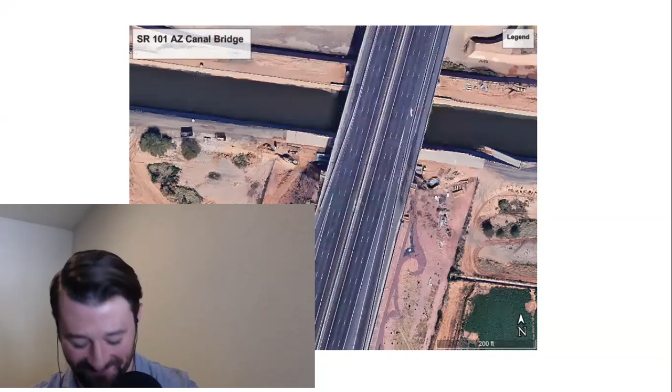It sits over the Arizona Canal. We have thousands of miles of irrigation canals, it seems like, throughout Phoenix. This is just one of them. We also have an issue out here with a lot of our bridge approach fills as they come up to abutments. There's a definite bump in the road. What's often happened is that our backfills on the bridge approaches weren't historically controlled in terms of moisture content when they were constructed. They were compacted to 95 or 100%, but moisture control wasn't key back in the day, and a lot of these have gotten wet since for various reasons, and we've had settlement at these approaches. This is just one of those, and what we had here was we were adding an outside general purpose lane to each northbound and southbound on the freeway.

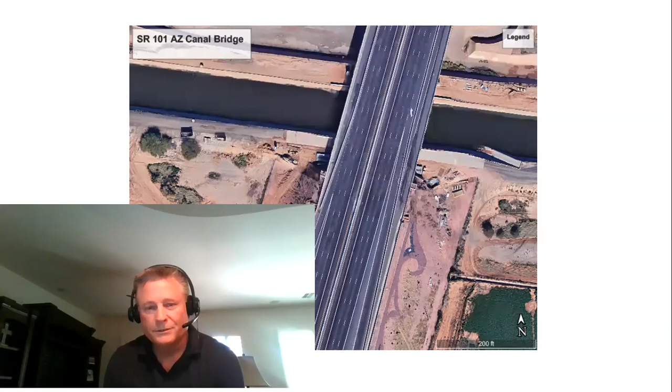And so you can imagine you're constructing a new lane at a certain profile, and you get up to this bridge approach, and there's a 3 to 4 inch bump in the pavement. So now your new profile doesn't match the existing profile. So what do you do? We need to fix the existing profile.

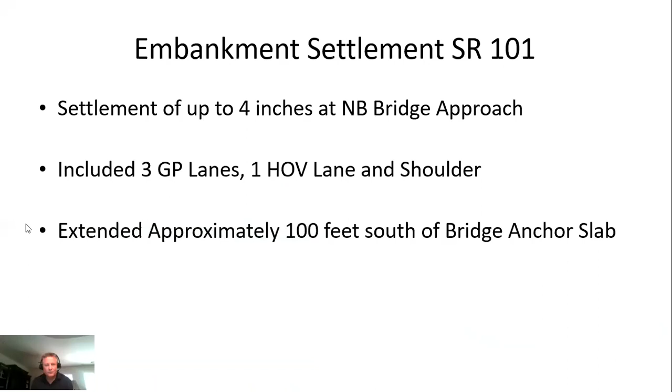Here we only addressed really the northbound bridge approach to this bridge. The other 3 corners basically have all had issues. I believe, was it Uretek or Eagle Lift was out there and possibly did some work on, was it the southbound approach? The southbound lanes, yeah, that was probably 2014. Okay. Yeah, so here we had a bump in the road of about 4 inches that we needed to deal with.

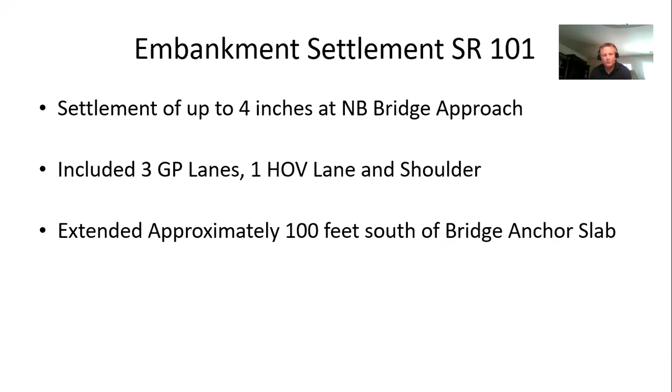Obviously, it's soft there, so this basically impacted all of the northbound lanes, including the shoulders. We had 3 general purpose lanes, an HOV lane to the inside, and the outside shoulder. Some profiling was done along the bridge itself to see kind of where it sat.

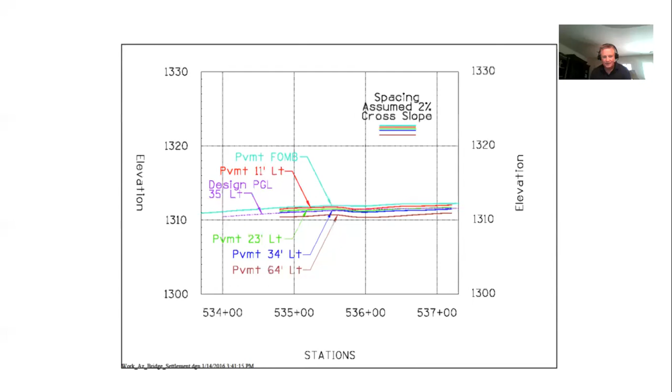It's been a little while since we've actually done this project now, so I'm not quite clear on all the details, but that's definitely the bump that we had to deal with. So why don't we go back to your first involvement with the project and when the existing lanes became identified as having a dip and how that would impact the new lanes.

Yeah. What we did there was our investigation for the general purpose lanes, which were being built to the outside, revealed to us that we had this issue. We sent out a couple emails to ADOT, said, hey, what do you want to do with this? It really wasn't in our scope or the prime designer's scope, in this case it was URS, to actually address what was going on within the existing lanes. However, obviously, you need to be able to tie it all together.

And so what they decided to do was make this a post-design remediation. And so Pulice Construction was already out on the job building the road. They added it basically into their scope to determine what we should do there. And so I don't know exactly who had WTI come out, but Western Technologies went out and drilled a couple holes. That may have been done directly for Pulice.

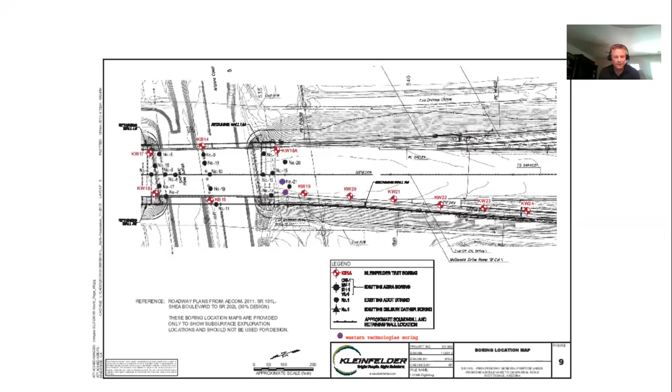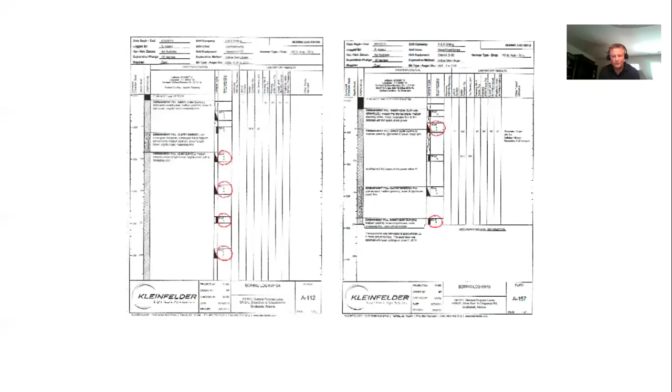So we couldn't really use those other than to get an idea of what was going on underneath the area where we're having settlement. And the soils at those depths actually look pretty good. So the red are really indicators of bad conditions. We've got bad conditions on that first boring from 10 to 25 feet. And then the other one shows it's softening in at 5 and 20 feet.

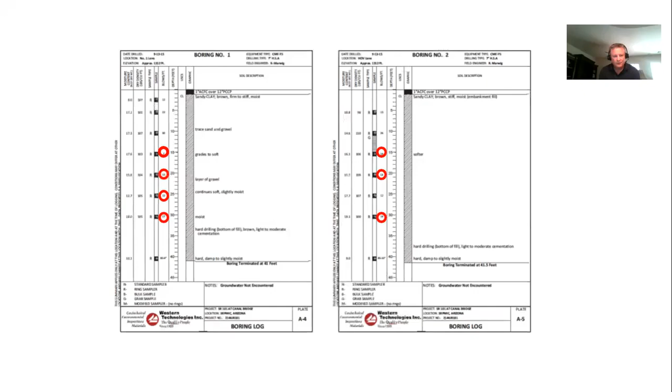And then the other two logs, which are maybe a little easier to read, those are all ring samples, not SPT values. You convert those to SPTs and you get values anywhere from about 3 to 11. So, they're pretty soft. Again, I think this material was probably put in fairly dry, got wet at some point, and just lost its strength. And so this is really the zone that we were dealing with, primarily from about 10 to maybe 25 feet.

Again, looking at this, then we could consider over excavation, pressure grouting, polyurethane foam injection. I touched on over-ex. Pressure grouting with cement: the only reason I tend to lean away from this on embankment fills is due to the fact that you're adding a lot of weight to an embankment when you use cement. Unless you get your pressure bulbs stacked on one another, you're going to have gaps in between where the weight of that grout is going to tend to want to collapse on the next bulb, basically.

And so if you have a bunch of independent bulbs within the fill, with any one particular hole, these bulbs, which are heavy, are going to want to consolidate onto one another. And so I've always tried to avoid that by going with something lighter. Now, obviously, polyurethane is extremely light, and the other great thing I really like about it is that it's a closed cell composition. It doesn't take on water once it's injected.

You can cut a cross section through it and it might look like a sponge, but with a closed cell, it's really not letting any water get within it. And so it's not gaining weight over time. It just finds its way into voids. And believe me, there were a lot of voids out there. We pumped a lot of grout, but you can go into that later.

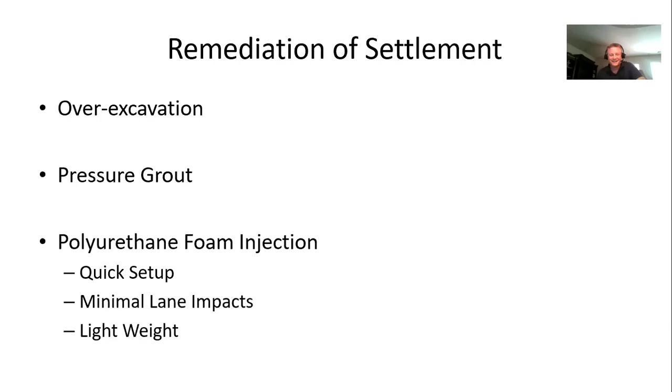I know a lot of the concern with ultimately the detour issue, right? Of some of these other alternatives were concerns when we were scheduling. And then we were also in a relatively, it's a freeway. It's a busy area of Scottsdale. You've got the casino. You've got Salt River Fields right there. Summer holidays. We were out there starting in May, and I think we even got close to 4th of July between spring training and. Mm-hmm. Oh yeah. All kinds of fun stuff to deal with. So I think what you guys did was you did all your work at night. All the work at night. We had about 2 lanes to work in at a time, plus a safety lane, depending on which 2 lanes we were working on.

But yeah, this graphic shows kind of the idea of what we're trying to accomplish. For those who aren't familiar with expanding polyurethane grout, we use a two-part polyurethane foaming system. So it starts out as two liquid components. When introduced to one another, the reaction between those components is an expansion. So the material used for this project had the opportunity to permeate through more granular soils first, and then as it started to expand, that expansion is what would cause the displacement, compaction, further densification of the embankment here. And as you continue to compact, you're building confining pressures, and ultimately, as those confining pressures build, eventually the path of least resistance becomes the load of the pavement.

And so in those shallower depths, you're actually able to accomplish lifting of the pavement, which we were able to do in this case. I don't know if we did a full 4 inches, but at least 3.5. Yeah, I think you maybe ran into somewhat a limiting factor on that inside median barrier where you couldn't lift it too far because it actually began to crack. I don't think you damaged it, but they didn't want to lift it any further. Is that right? Yeah. Ultimately, when you're lifting a pavement or a foundation, if there are areas that you don't want to lift, that's going to impact how much you can lift elsewhere, because you kind of have to taper it then, right?

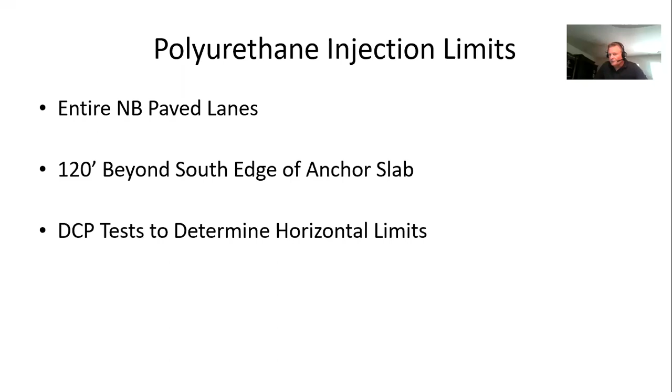Yeah, and so we used that to basically set our limits on what we wanted to inject, and then we further refined that later as they were driving the rods themselves to come up with what we wanted. And then we knew we had to go deeper right near the abutments, and so I believe some of that you pre-drilled. And you'll talk about that, but it was actually a layer where we weren't necessarily able to get down through it with the DCP, but we knew we had something soft down below, and so we also concentrated on that a bit.

Yeah, so with a lot of the projects that we do, it's very common that everything can be brought in. We drill what people refer to as penny-sized holes through pavement and foundations to do this injection process. Inject both the A and the B components of the polyurethane foaming system, and that's relatively non-invasive, by comparison to over-excavation and having to repave, or larger cores for other forms of grouting, right?

In this case, we were going so deep that the handheld hammer drills that we use to pilot holes for the injection pipes, as well as drive the injection pipes to depth, weren't enough. We were building so much skin friction on the injection pipes themselves that even if you could pilot a hole to 15 feet, you couldn't push the half-inch pipe through it. And so we were having to go with larger diameter holes. We ended up using a percussion drill mounted on the boom of a full-size excavator.

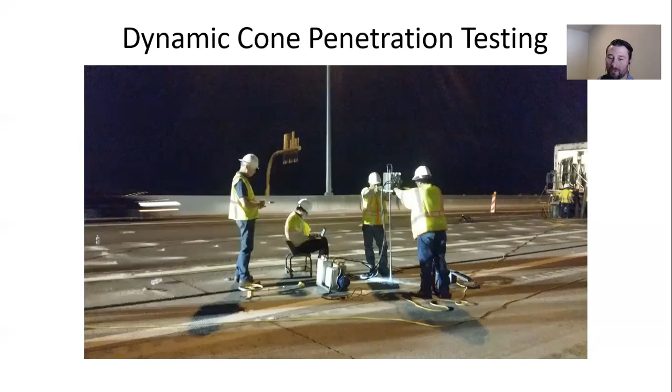I'll get to that here in a second, but I'll step back to the dynamic cone penetrometer. That's Keith, his handsome self, there observing the penetration testing with the crew. The dynamic cone penetrometer, that's the device being held by the two men standing there. And similar to other forms of penetration testing, we're measuring blow counts. In this case, we use a Pagani, so that utilizes 35.6 millimeter diameter cones. On top of that sacrificial cone is placed a 20 millimeter diameter rod, and a hammer, about 66 pounds, is dropped on top of that repeatedly from a free fall height of 20 centimeters.

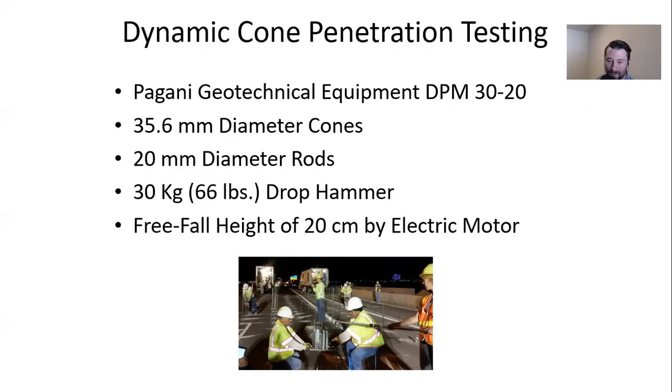And that's driven by an electric motor as opposed to being lifted and let go of by hand, which is typical of other dynamic cone penetrometers. So the 66-pound hammer does give us the ability to make it through tighter soils, some gravel, different forms of aggregate. I've even seen it break through smaller cobbles. So you might be getting 50, 60 blows, which would be really high, and then it breaks that cobble and drops a foot because that cobble is in loose soil, right?

And ideally, using this 66-pound hammer, we're looking for 10 blows for 10 centimeters of travel. The DCP rods are marked every 10 centimeters. There's an engraved ring on the rod, and we're just measuring blows of that hammer. The more blows it takes for that rod to travel 10 centimeters, the more dense and likely the greater load bearing capacity that soil is going to have. If it travels a full 10 centimeters in one blow, that's very loose soil, or possibly a void.

In some of these cases, I don't have them here, some of these single blow counts, that's not even really a full blow. That's the weight of the hammer. So it was just sliding 10 centimeters at a time into the embankment.

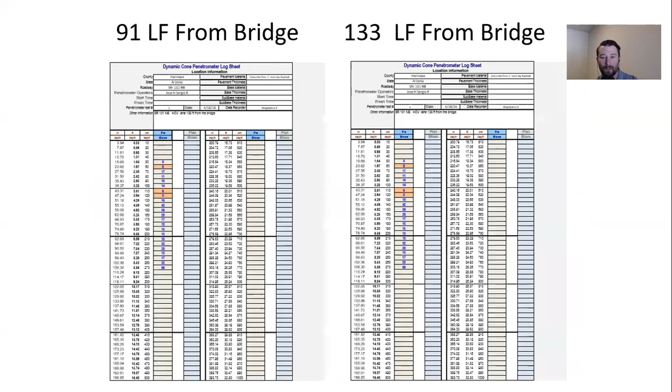I'm going to go back here just a second to go into a little bit more detail on this process. I've described the material that's used, but in order to uniformly densify the soils, what we have to do is inject at multiple depths. Unlike what's more common with other forms of compaction grouting, displacement grouting, jet grouting, instead of drilling to the full depth of the issue and pulling our pipes out as we inject, we place multiple pipes at varying depth intervals, because from the tip of our injection pipe, we only expect to influence soil within the first 3 feet.

So with cementitious grouting, you're trying to create bulbs. We're trying to create zones of influence. And because our material starts out as a liquid, it's going to travel the path of least resistance and then expand and push loose material into more dense material. And as those confining pressures start to give you uplift or bump at the surface, because it's only going to travel so far and influence so much soil from each injection pipe, we actually have to stack those injections. And so on a project like this, we were spacing our injection pipes on 4-foot centers throughout the area of concern.

And again, we were the full width of the lanes, and 120 center lane feet long was our project area. And so throughout there, we have to drill holes for our injection pipes every 4 feet, lengthwise and widthwise. And because we were going so deep and building that skin friction, instead of drilling multiple holes, we drilled single holes and dropped a cluster of 5, 10, 15, 20, 25, 5 plus tubes. I think we actually added more than 5 just in case tubes got clogged. But we dropped all of those tubes to depth at once, and then came back and did our injection.

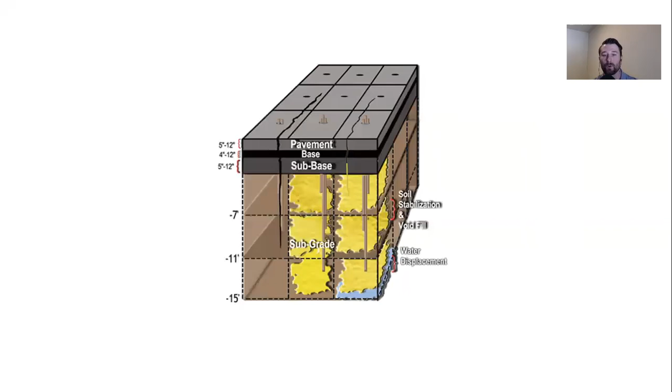How about project wins, Keith? Project wins. Well, here, certainly it fixed the problem. I know you guys injected a lot of foam. So there's certainly voids down there. There's certainly loose soils that we know that the polyurethane was penetrating.

I think as you inject your foam, you do it from top down, right? Typically, yes. So because the material is expansive, expandable up to 20 times its liquid volume, typically, for the grades of material that we use for lifting, it's typically expandable up to 20 times its liquid volume. But under confining pressures, under the load of the road, underneath the confining pressures of the soils it's being injected into, it's not going to expand its full 20 times.

So under no confining pressures, if we were to shoot it out on a table or on the floor, it might rise 20 times. What might start out as a 4-pound polymer or a 3-pound polymer, a material that's 3 or 4 pounds per cubic foot in that free rise condition, might actually cure closer to 10, 12 pounds per cubic foot because of its further densification. But sorry to cut you off, Keith.